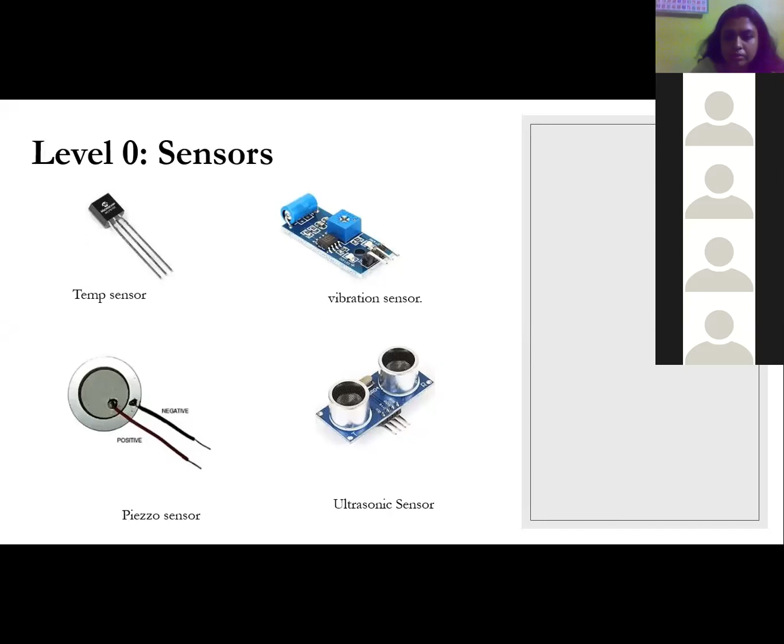Now the next part is piezo sensor and ultrasonic sensor. What we do in piezo sensor: here the pressure will be converted into electrical signal, meaning some signal will be generated by the pressure also. And the ultrasonic sensor, what does it do? It does obstacle detection, meaning if any obstacle comes in front of the sensor, it will give us detection. All these electronic equipments are only for using in real time also.

But we will continue with the embedded electronic system for a far distance, meaning the embedded electronics, including the ultrasonic sensor, will be put somewhere in the world, and I will be situated in West Bengal, and I will continue it from here.

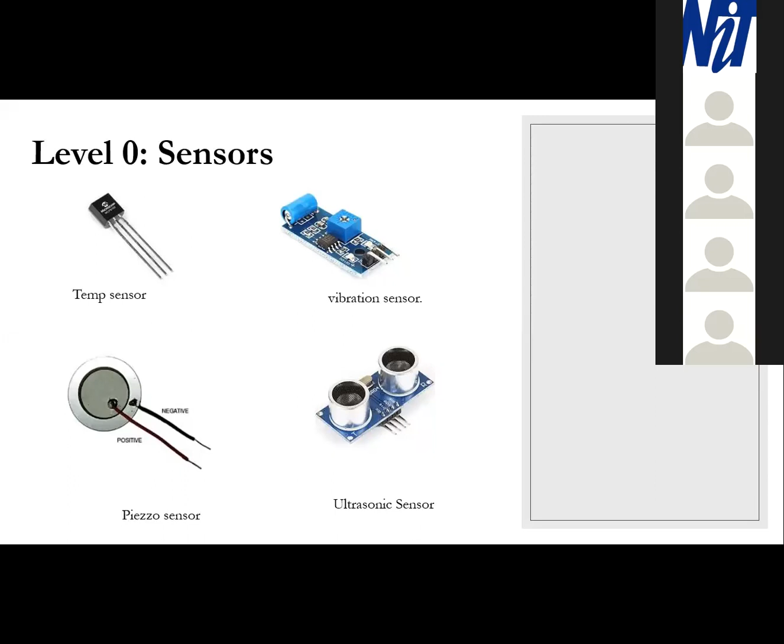So I will come to level one: what is the signal processing module? This is some kind of vast topic which people don't know, what exactly these embedded electronic systems are doing. But don't think so much, I will elaborate those topics clearly.

In signal processing modules, the data is coming from the system, from the sensors, and the sensor will give the data to Node MCU. At first, I will discuss Node MCU. Node MCU is the embedded system which includes the ESP8266 Wi-Fi module. ESP8266 isn't doing much, it's not just a bigger name, it only does Wi-Fi connectivity, and by Wi-Fi connectivity it will access the internet. So Node MCU is just doing the internet connectivity between the internet server and the sensor. Now I will come to the UNO plus Wi-Fi R3.

So this is a very new embedded electronic system. It is combined with the UNO board, meaning Atmega 328, with the NodeMCU chip, ESP8266, and includes 32 MB of memory space, which is huge for uploading code. It has much more variety of analog pins, because NodeMCU has only a single analog pin, meaning only a single sensor can be operated from NodeMCU, but with Atmega 328 we can use multiple sensors. So UNO plus Wi-Fi R3 is a bigger option for engineers doing projects in their colleges.

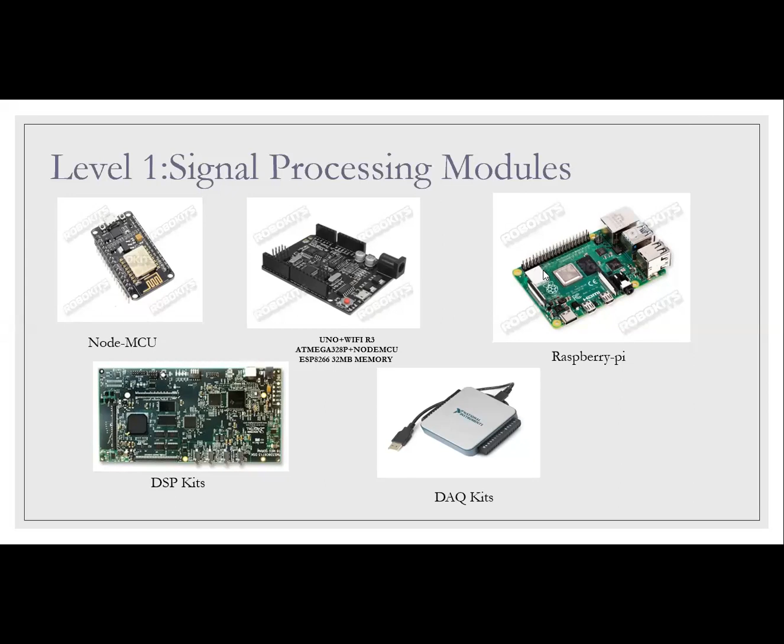Now we will come to the most robust and vast topic, the Raspberry Pi. Everyone knows it as the Pi. It runs the Pi OS, a Linux OS. It can also do some robotics work, because it contains GPIO pins, general purpose input output pins. With these pins we can operate robotics things, some digital things, and monitor some sensors. It also contains ports like HDMI, and it can access Wi-Fi too.

Next we will come to the DSP kit. The DSP kit is the costliest, not in every aspect, but costly because normal people and students can't afford it, since DSP is used mostly in robotics companies or advanced robot building techniques.

Yes, can you be a little slower? People are having trouble catching up with you. Speak slowly, okay? Okay, okay. From which part should I start in this slide?

Start from Raspberry Pi again, I think. Okay, Raspberry Pi. So Raspberry Pi is a compact, small laptop PC, a pocket-carryable thing, because it contains 1 GB of RAM and a certain amount of memory space, since you can put SD cards, and as much longer the SD card, your memory will be just as long. It can contain a Wi-Fi module, it can contain a LAN port, but it also has GPIO pins, general purpose input output pins. What exactly do the GPIO pins do? GPIO pins take inputs and give outputs. For that purpose, each pin has a particular number, and by that number you have to program it in Python.

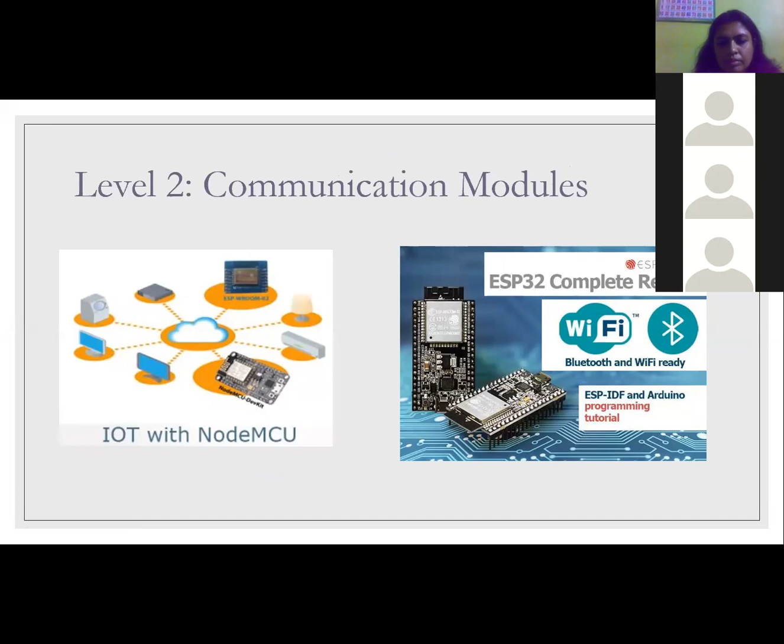I was just asking if there is any way to increase the number of analog pins in NodeMCU, like using something like multiplexing? But you've already given the answer yourself, because we know the concept of multiplexer, right? What is a multiplexer exactly doing? Can you please elaborate? If not, okay, I will elaborate.

It's actually about giving one input and extending it for multiple outputs. Suppose I'm working with a 1x8 multiplexer. What will it exactly do? It has one 8-input pin set and one output pin, connected to the A0 pin of the NodeMCU, or another analog pin. It goes through all analog input pins from 0 to 8 constantly. While contacting pin 1, it stops contacting pin 0. While at pin 2, it stops contacting pin 1, and so on, sending the data to the NodeMCU or any embedded electronic system present.

I have another question. If you are extending from one analog pin to multiple, like 8 analog pins, then you can connect 8 sensors. If you control 8 sensors in 8 different situations, can you control them, or will it control at once also? I understand you're a bit hesitant about the data controlling part, because 8 sensors means 8 data will come - how can I handle that?

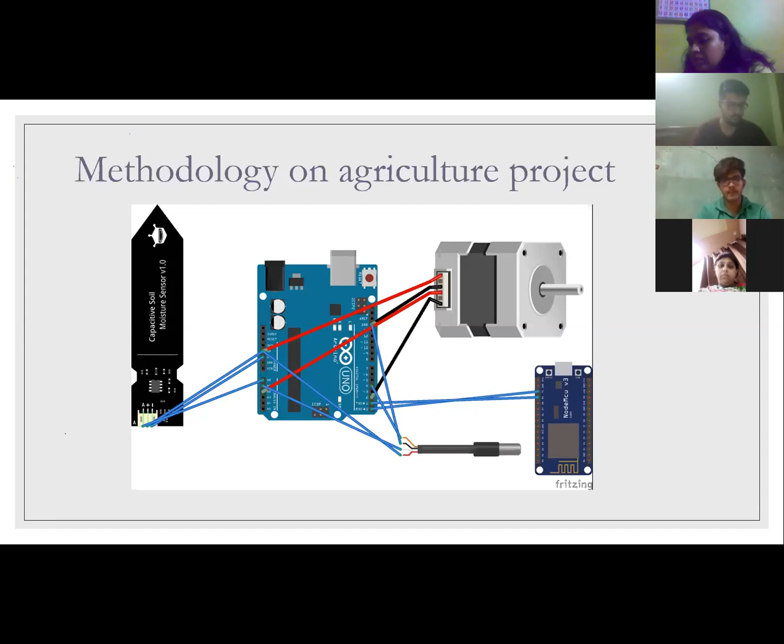The pump control system will also be controlled by the farmer's phone, meaning a website or mobile app is given to farmers who can control it just by sitting at home. As I have shown in our website example, the farmer can download a graphical representation of his paddy field. No need to understand the graphical representation - just send it to a pesticide shop or some laboratory, and they will give suggestions on the paddy field. This is how IoT can help our farmers grow their production.

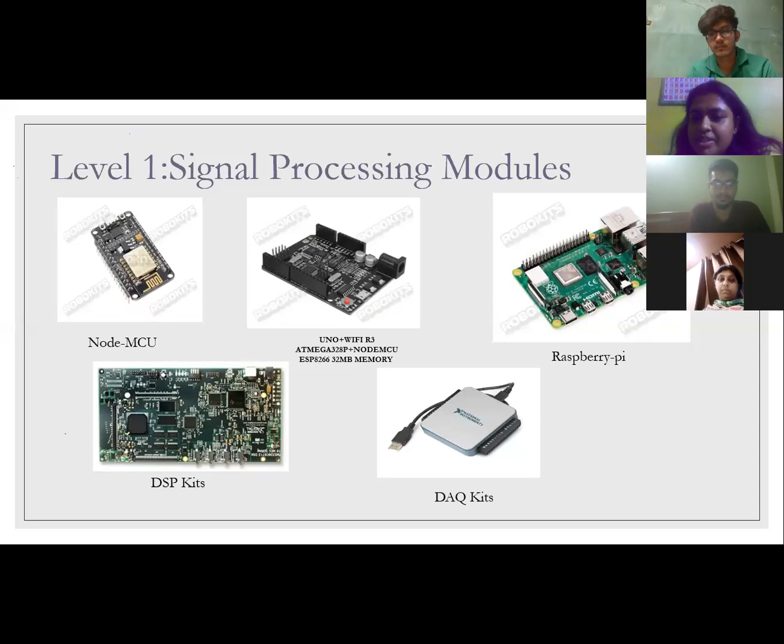Okay. So Roktim, okay you may continue. Yeah, okay, now I will go to the demonstration part.

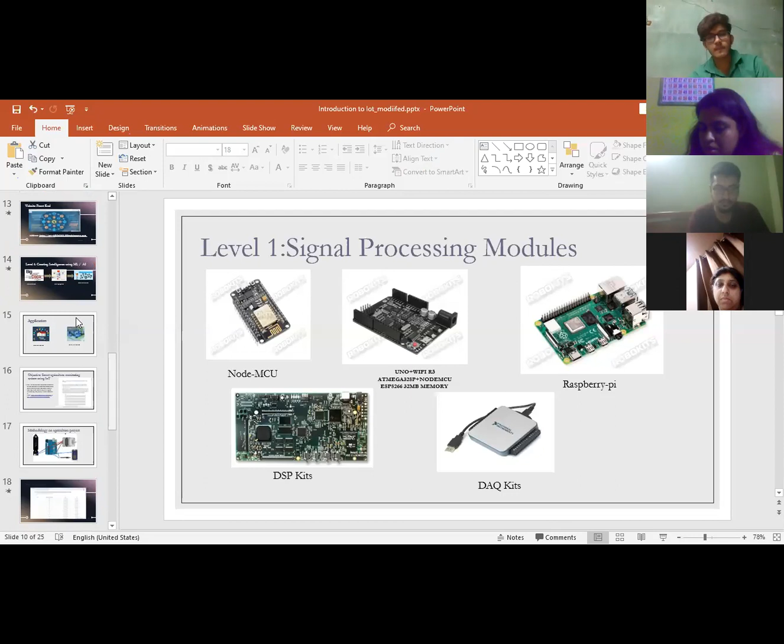See, in this website URL pushing method, all the Facebook login sign-up process or this kind of logging things will work. Just like getting your user ID and password in the URL, and it will push to its database. Matching those by user ID and matching the password, it will open your account. Okay, by that, your Facebook ID, it's working.

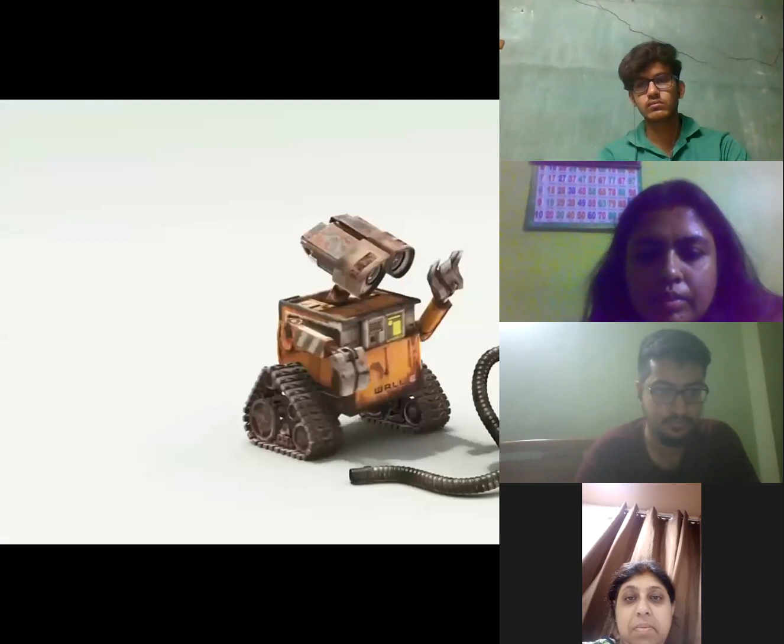I think you now understand what is IoT, what is Internet of Things, and how it is implemented, as it was very well discussed by Ruktim Pratihar, one of my fellow mates. So now you will know what is robotics, and I am very thankful to everyone because it is my privilege to become a mentor of this Mentee Become Mentor program.

So here you are seeing a video, a short video. Everyone knows what this is - this is Wall-E, the most famous film on robots, a science fiction movie on robots.

So now we are moving, we are jumping. Before jumping into something, I would like to give you the basic idea of how our session will go. I am Orko Majumdar, and I am sharing this session with my mate, Demallo Sadhukan. So here is the guideline of how we do this total webinar. This is the first chapter I will discuss with you, that is introduction and history of robotics.

Before that, I will discuss the classification of robots. As our respected ma'am said, I am going to discuss how to build manual robots, and I will give you some idea about different types of autonomous robots, from underwater robots to humanoid. So here I have classified some parts of robots.

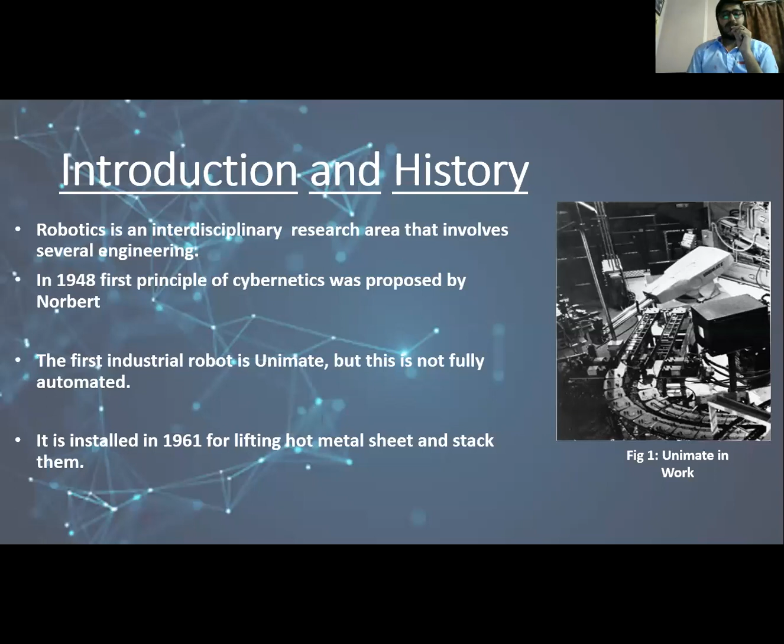This is the basic introduction and history of robotics and its first robots. Now I am going to move to the classification section. We can classify robots, first of all, as manual robots, which look like this. The robots which involve human beings to control them, we know them as manual robots.

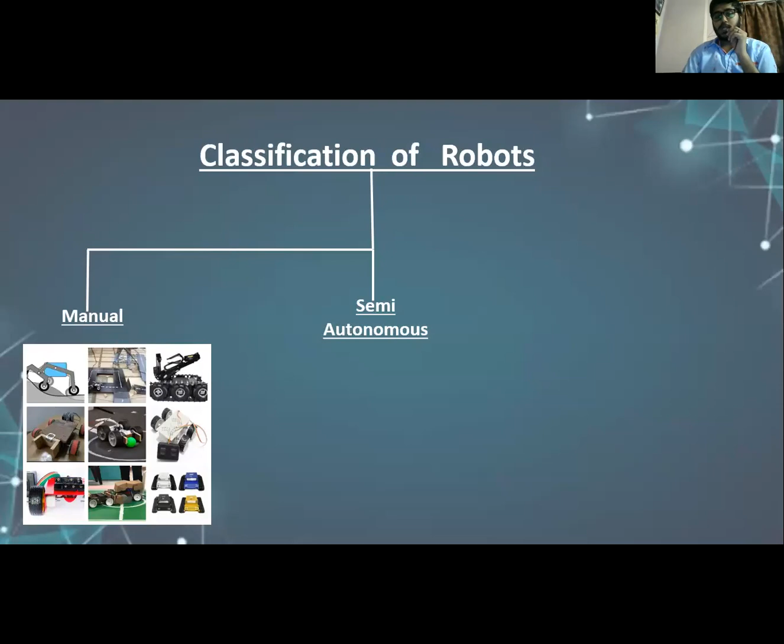The second part of robots are semi-autonomous robots. They also involve humans, but they are not directly connected with the human being. We can control this type of robot from a remote area, and here comes the idea of IoT for controlling these robots from a remote location. Here are a few semi-autonomous robots.

You have all heard about the most interesting project of recent days, the gesture control robots. Actually, gesture control robots are semi-autonomous robots. The third part of robots are autonomous robots, which are nothing but fully autonomous robots that are programmable and particularly initialized for doing a particular task.

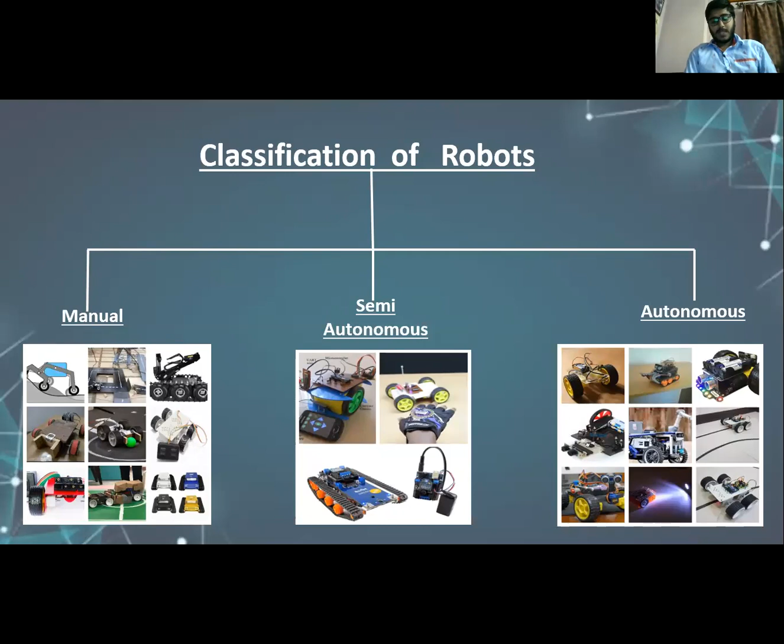So here I am going to start the making procedure of manual robots. If you have any queries, feel free to ask. Before we go to making a manual robot, we need to get some idea about its components. There are some basic components required for making manual robots: chassis, DPDT switch, switch box, motors, some connecting wires, and a power supply.

After gathering all these things, we have to make the connection of the DPDT switch. DPDT switches are the most common switch. I have discussed it later, and I have also shown you how to make the connection between DPDT switches and how to build them. I have the full demonstration later.

Next we have to join the motor with the chassis, because motors are a very important part for manual robots, and they help the manual robots move in every direction. Motor is also a very important part for manual robots. The next thing we have to do is establish connection between the motors and the switches.

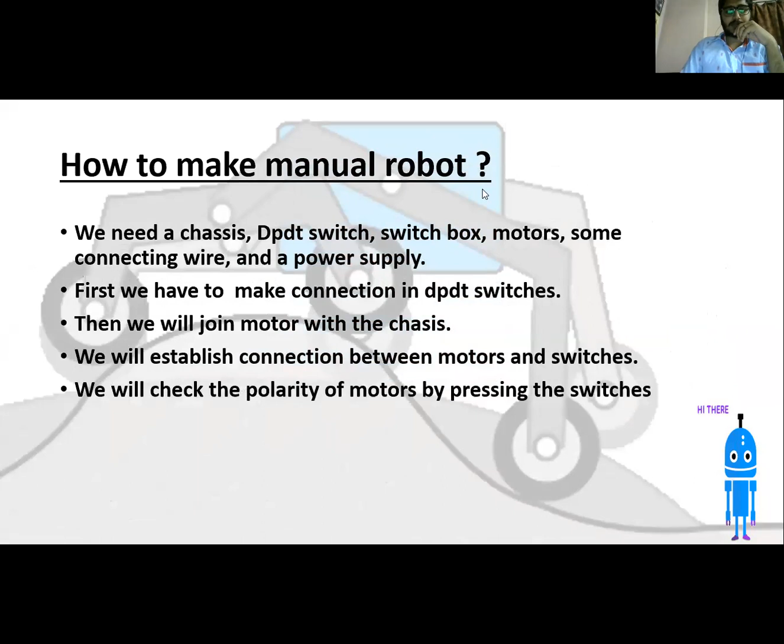Now, the most important thing: if we don't check the polarity of the motor, it can move in any direction, which will make a hazardous situation. So we have to check the polarity of the motor before finalizing our robot.

Now we'll have to add the power supply, because power supply is very important for moving the robots. Now I will give you some basic idea about these components.

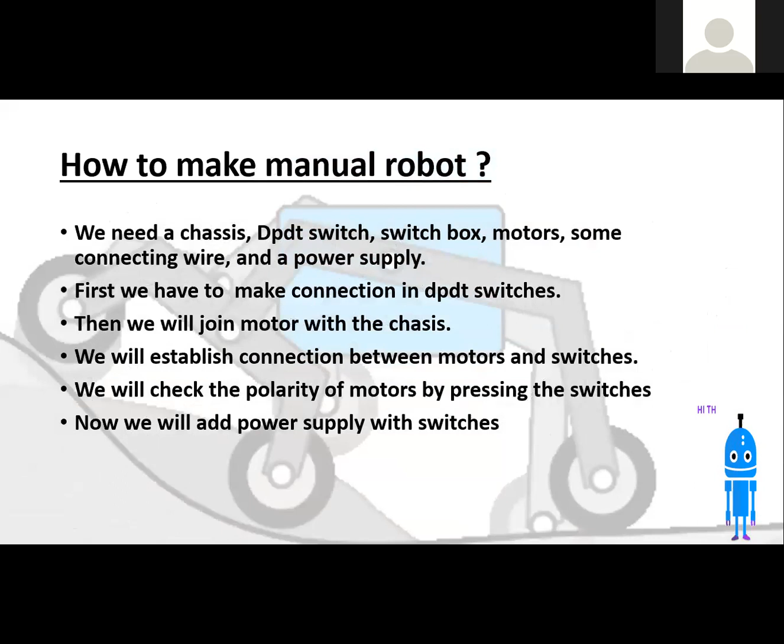I divided the components as per needs. There are some basic components which are required for manual robots, as well as semi-autonomous robots and autonomous robots. The first component in this basic components list is the chassis. Chassis is nothing but a framework that holds the motors and everything, your microcontroller and everything, like a car. The car has an outer body that helps to attach everything within it.

That is the chassis, and here are some pictures of available chassis. These chassis are very much available in the market, and the chassis is very important for manual robots because manual robots are built for different types of competitions and to overcome different types of obstacles. So for that reason, if your chassis has not been prepared properly, you can face some problems.

The next basic component is power supply. Power supply is very important for any kind of robotics. The power supply depends upon the selection of your motors. I will discuss the motor section in the next slide, but after choosing the motors, you have to give attention to the power supply.

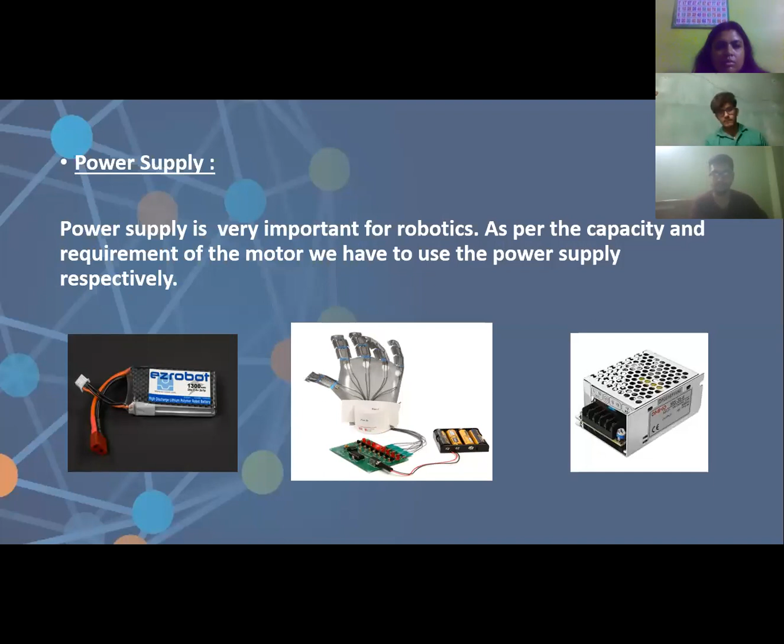For autonomous robots, we can use batteries, and there are different types available. Here I am showing you the LiPo battery, but we can also use pencil batteries with a battery adapter. As per your motor's requirement, you have to select your power supply board. Another good power supply, I think, for manual robots is the variac, the voltage variac.

The next thing is motors. Motors are like the heart of robots. If we want to move forward, backward, or in any direction, we need to give attention to the motors. But before choosing the motors,

we have to know what factors might cause problems after choosing the wrong motors. That is the weight of the chassis. The material of the chassis you are using amplifies the weight of that chassis. If you are using a metal chassis that is quite heavy, and you take a motor meant for a toy, that will not make the chassis move. You have to choose the motors as per your requirement.

The next factor is the obstacle you want to overcome through the manual robot. If you require only high torque, then you have to select a motor which provides you high torque.

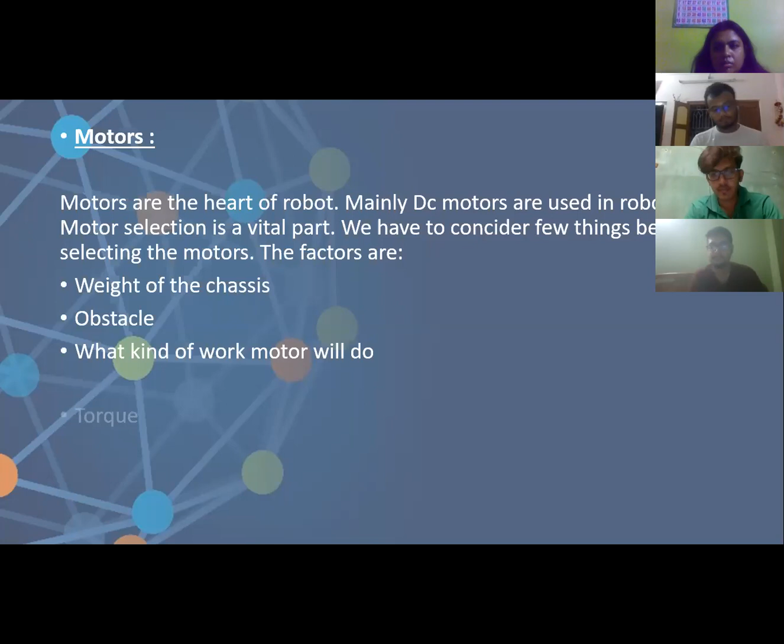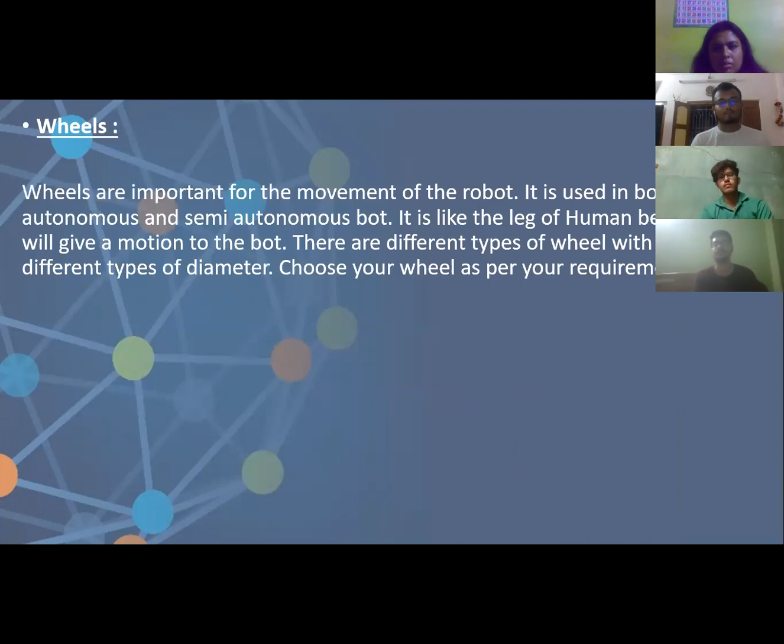Another important thing in robotics is its wheels, or its legs. Wheels work as our legs. If we attach a motor to the chassis and don't give it a wheel, it's not going to move anywhere. So the wheel is very important, and you can choose a wheel as per your requirement.

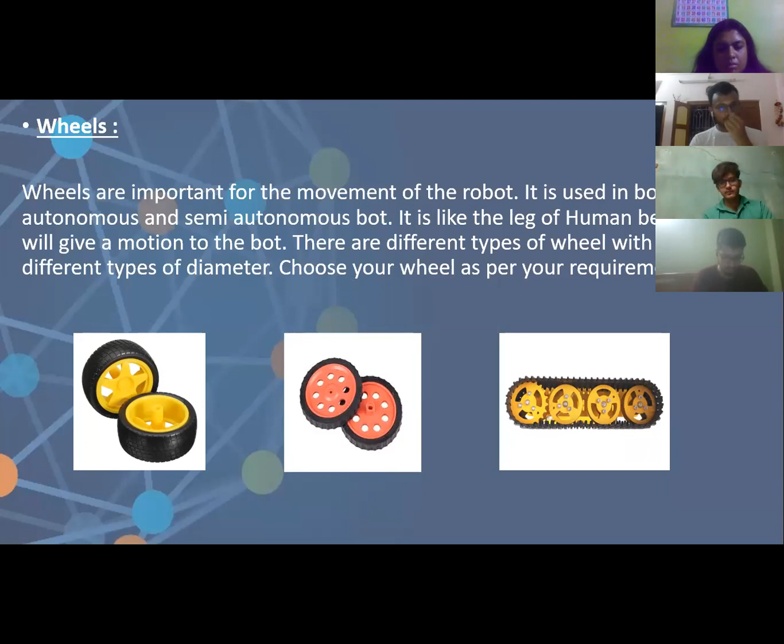Now I would like to share two more components required for manual robots. That is the switch box. A switch box is nothing but a plastic case which helps hold the switch,

and another thing is the DPDT switch. DPDT switch is nothing but the double pole double throw switch. It has two inputs and four outputs. So when we press the switch, the four outputs get connected simultaneously, and when we release the switch, the four outputs are disconnected from each other.

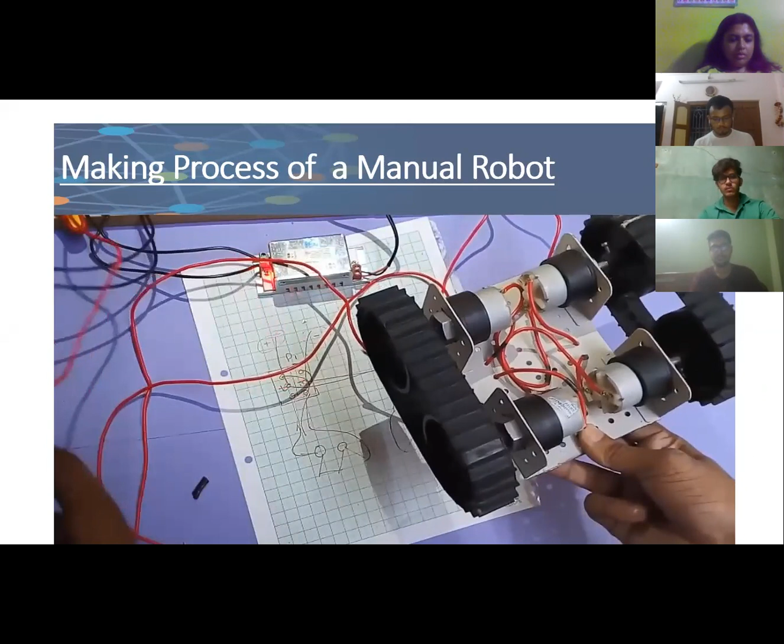Have you seen that when the switch is pressed forward, the motors were moving forward, and when pressed backwards, the motor was also moving backwards? Now if you press one switch upwards and another switch downwards, then your robot will turn left or right, as shown in this video.

I hope you all understand the manual robot parts, because this is the end of the manual robot part. Before I continue to the autonomous part, I would like to ask if you have any problems understanding this manual robot section, or if I can move to the autonomous part.

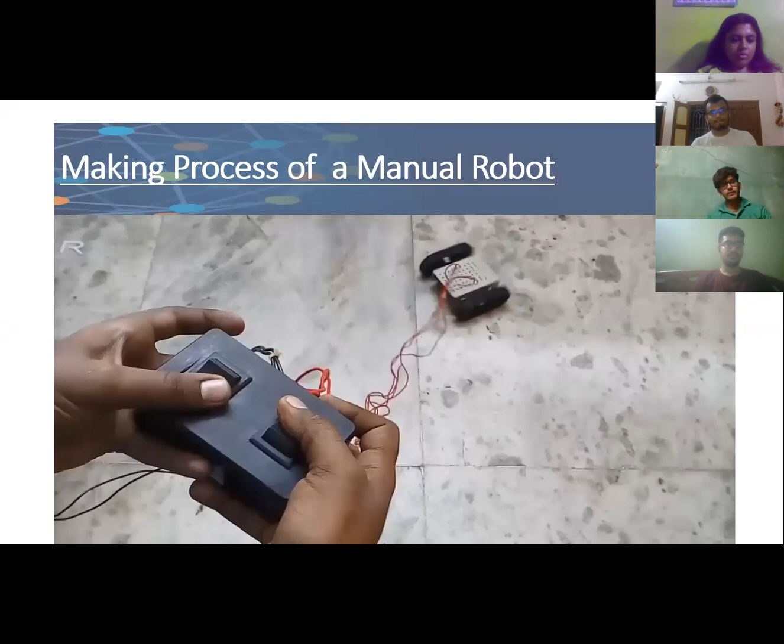Hello Arkoda, I am Hironangshu from first year. My question is, if we want to rotate all the wheels independently, what will be the connection in the DPDT switch? All the wheels independently? Yes. Means one motor at a time? Yes. So in that case, will we be able to handle it in the DPDT switch, or should we use anything else?

Actually the connection I am showing here is only built for one motor. By building this type of connection, you can control one motor at a time, and you can also control 2 motors from one switch at a time. Okay, so in this DPDT switch we cannot control all the wheels independently.

All the wheels independently means, what do you want to ask? I'm not getting your question actually. He is asking can you control each wheel, that means like left side one wheel with one controller. No, that will not be possible with a DPDT switch. Either you have to control the entire one side from a switch, or just a single motor. Okay, thank you.

Any other question? So I think I can move forward, right? Hello. Yes, you can move forward. Yes, you can move. Okay.

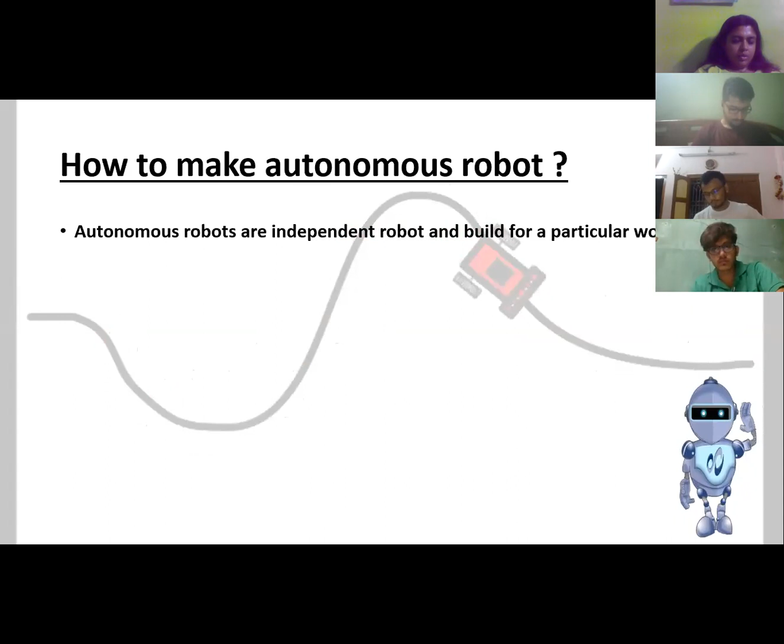Like if I want a robot which will go and identify fire and then work as a fire extinguisher, I have to program it like that. Or if I want a robot that only follows a line, I have to program it like that. That is the autonomous robot. Those robots are independent for a particular work, and no human control is actually required after programming it.

So the components we require for programming this type of robot are the microcontroller, most commonly known as Arduino Uno. And the next very important thing for autonomous robots is a motor driver. Motor driver is nothing but an integrated circuit which helps the motor, and which builds the connection between the motors and the microcontroller to move it forward or backward.

So here are some basic types of autonomous robots that we can actually build, or we also develop this kind of robots in our lab. The first one is the line following robot. Those who are interested in robotics have already heard about this, as line follower events are also held.

Someone wants to ask that if you want to move a motor independently, then what type of switch box or what type of switch can we use? For independent movement, what do you want to do with your motors? If it will only go forward, you can use a normal switch. Or if you want your motor to go forward and also come backward, then you have to use a DPDT switch with only a single motor connection. So I want to know what you want to do with your motor.

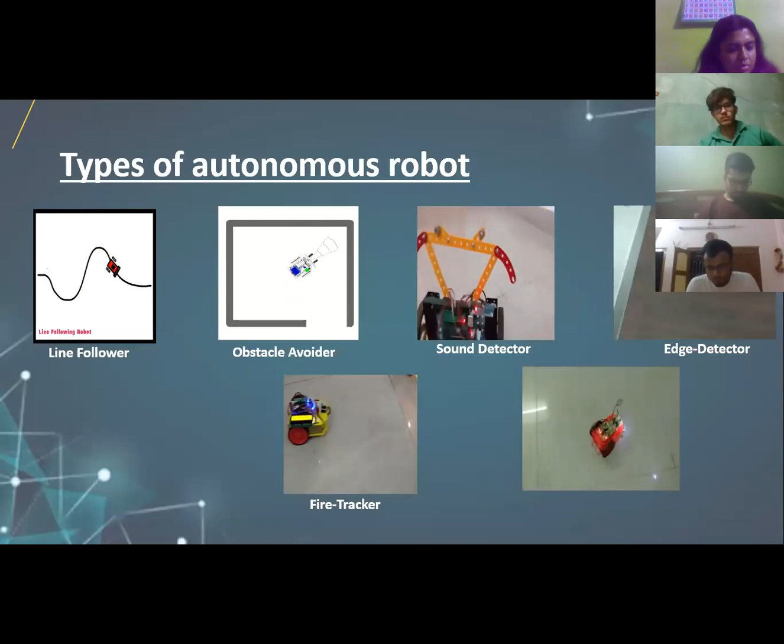The robot will follow the fire source and move accordingly towards it. The next robot is the light following robot. Using an LDR, we can make a robot which will follow a light. So these are the different types of autonomous robots.

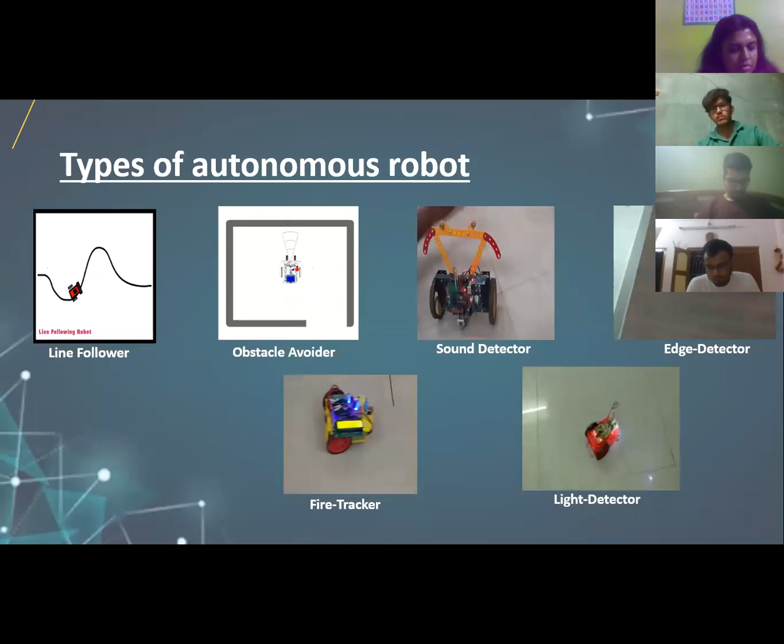There are also various other types of autonomous robots. Now we will learn how to build these autonomous robots and what components we require for making this type of autonomous robot.

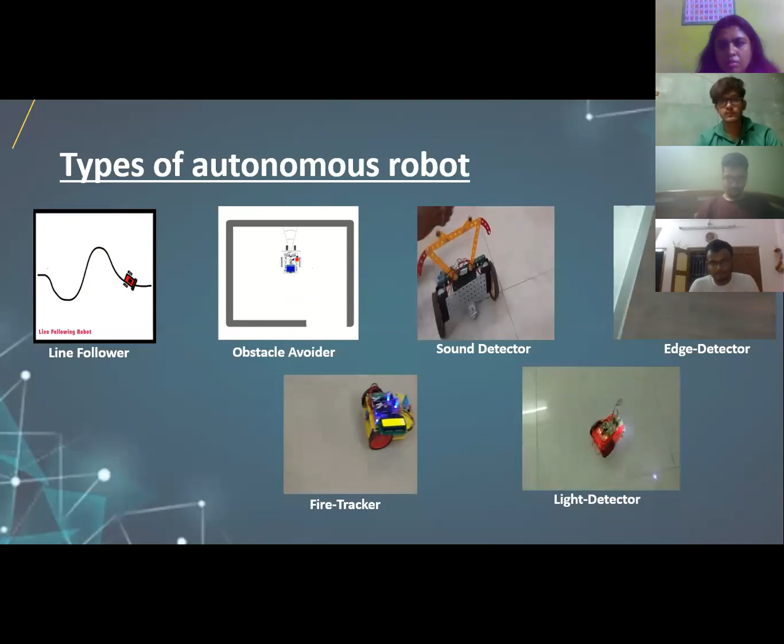So the first component that we require for making the autonomous robot is a microcontroller. A microcontroller is like a small computer which has compact memory for caching a program and performs as per the program directed to it.

The next thing for autonomous robots, and a very important thing, is the sensor. The sensor will sense the physical parameter and give feedback to the microcontroller by changing its resistance.

The next important thing for autonomous robots is the motor driver. The motor driver helps to drive the motor by taking a signal from the microcontroller.

And number 4 is the controller for semi-autonomous robot. We use this type of controller for controlling semi-autonomous robots. Now I will discuss about the microcontrollers part.

So what is the microcontroller? Microcontroller is a small computer on a single IC. We all know the microcontroller commonly used in our every project, that is Arduino Uno. Arduino Uno is a microcontroller which uses the Atmega IC, Atmega chip, as its microcontroller. Arduino is the name of the company which is building this board.

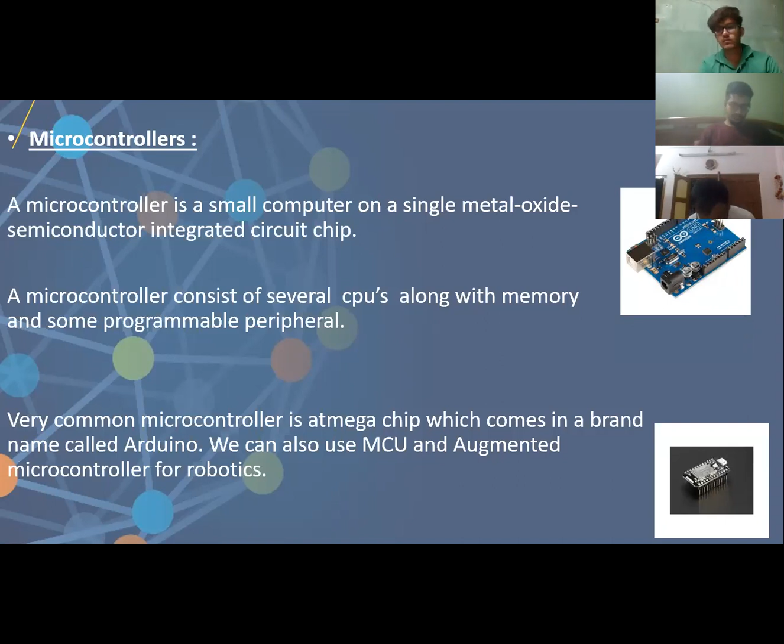So the next part is sensor. I hope you all know about sensors. A sensor is a subsystem which helps to sense the natural parameter and send feedback by changing its resistance or generating some voltage. The sensors used in autonomous robots always change their resistance so that we can understand there is a change in the physical parameter.

If we use an ultrasonic sensor to measure distance, when it comes closer to any obstacle, it changes its resistance. Its resistance value becomes high, or as per we program.

So there are different types of sensors we know. There is ultrasonic sensor for sensing obstacles or measuring distance. There are IR sensors or infrared sensors, also used for sensing light, and there are LDR, light dependent resistors, which perform as per the change in resistance in presence of light. And there are various types of proximity sensors, sound sensors, temperature sensors, and different kinds of sensors.

And another important thing is the motor driver. We cannot connect the motor directly with the microcontrollers, because the microcontrollers generate an output of 5 volts, and the motors actually used in this type of robotics or autonomous robots require minimum 9 volts of power. So we are not able to connect the motor directly with the microcontroller.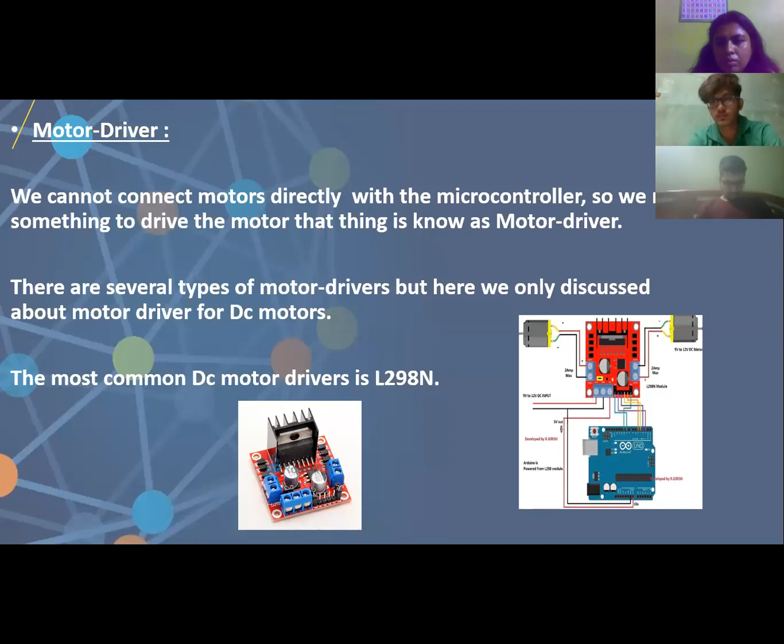So for the semi-autonomous robots, there are a few things which are very important apart from the autonomous section, microcontrollers, and all — there is its controller. When we make some robot that we have to control from a remote location, or perform work but cannot be physically present at the spot where the robot is placed, we have to use some semi-autonomous connection, by which we control that robot, called controllers.

There are few controllers: Bluetooth control and transmitter-receiver control. So basically, the transmitter is in our hand, and the receiver is connected with our microcontroller. The receiver gets the signal from the transmitter, and as per the signal it gets, it informs the microcontroller to do the work accordingly.